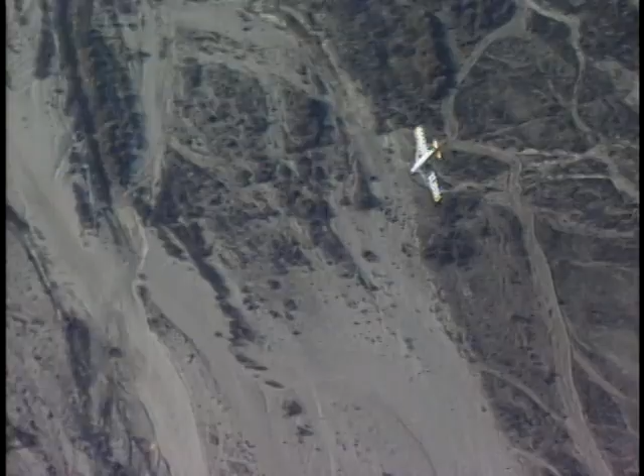You're about to see one of a series of accident prevention safety seminars I've been conducting across the country for the FAA. This seminar addresses the stall spin awareness training requirements outlined in the FARs. You'll also see actual flight footage used to illustrate and clarify many of the points discussed. As always, if this video prompts you to take some hands-on spin training, please be sure you're comfortable with your instructor's qualifications and only use the appropriate equipment in the appropriate airspace.

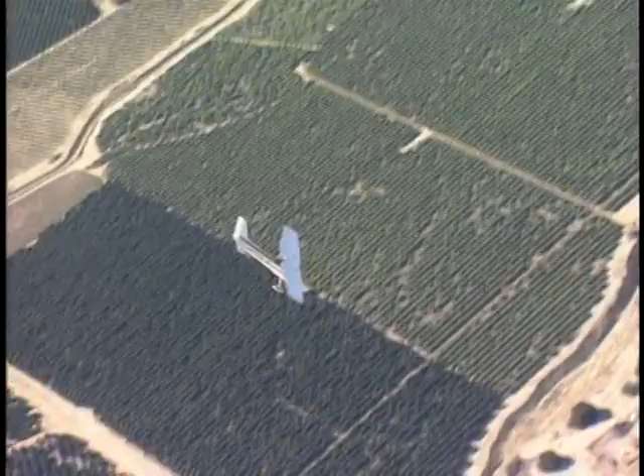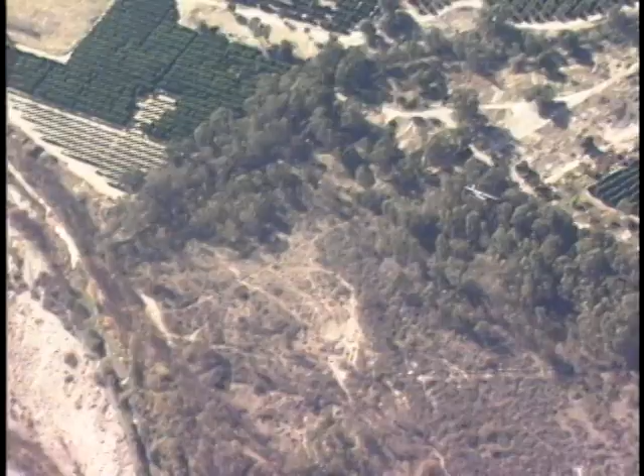I open my seminars by showing a video clip of a Cessna 150 spinning high above the Santa Clara Valley near Santa Paula, California. Let's view that clip now and then continue with the seminar. This airplane is spinning, but is it really out of control? Year after year, National Transportation Safety Board statistics show that the majority of aviation accidents occur during day VFR conditions, and many can be attributed to pilot error. If you were the pilot in command, would you know how to get yourself and your passengers out of this situation?

Okay, the first three comments I'll make are: one, yes, we do eventually recover from the spin. The second is this is a standard Cessna 150. It is not an Aerobat. There's nothing unusual about the airplane other than given the right conditions, the airplane will enter a spin and stay in a spin just fine until the pilot does something to recover.

And the third comment is, by the fourth turn, yes, I wasn't feeling very well.

Okay? So having said that, to start off a discussion on stall spin awareness, I'm going to just review a little bit of the history of how we got to the point we are now with the latest changes to the regulations, and just point out some of the key points in history. And we have to go back to 1912 to a British test pilot by the name of Wilfred Parke, who one day while testing an airplane inadvertently entered a spin, and being a good test pilot, he tried to figure out, well, gee, how am I going to get out of this now?

And he played around with different control inputs, and he identified the application of opposite rudder as being critical for recovering from the spin. And he actually recovered from this inadvertent spin about 50 feet above the ground. So he landed and he started to tell people what had happened. And so once people realized they could recover from these things, they became an evasive maneuver used during World War I. And by 1917, spins were actually introduced as part of primary pilot training.

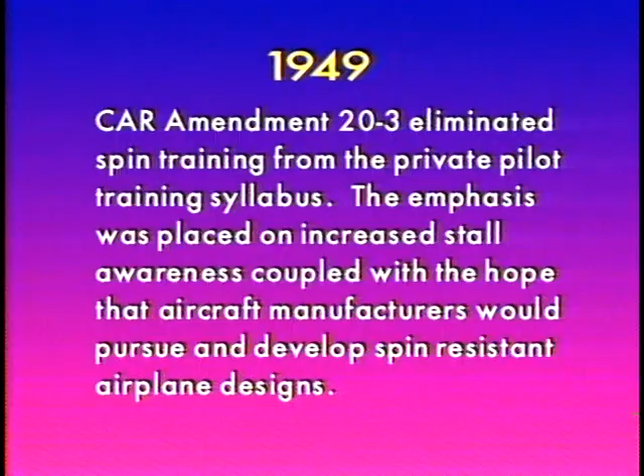And the government was also hoping that airplane manufacturers would take it upon themselves to build airplanes that were more spin resistant. Unfortunately, that didn't really happen. And so by 1991, effective April 15th of this year, FAR Amendment number 90 went into effect, and it now requires stall spin awareness training. Okay? And these levels of training for stall spin awareness affect everybody at some point in time. They affect recreational pilots, private pilots, commercial, glider, and eventually CFI applicants who will have to actually do spin training in order to get their CFI rating.

Well, based on this brief little overview of the history, we can come up with a couple of different points. First of all, historically, it seems about every 40 years something significant happens as far as stall spin awareness. So based on that, I figure about the year 2030 we'll have spin training required again for all primary pilots.

Even though part of the reason that they deleted the spin requirements back in 1949 was to try to reduce the number of fatalities due to stall spin accidents in the general aviation community, still today we're faced with the problem that annually stall spin accidents account for the greatest number of fatalities. If you're going to die in a general aviation airplane, more than likely it'll be in a stall spin accident. So that still hasn't changed, although the percentage has dropped dramatically from the 40s.

Also, the majority of stall spin accidents occur during the critical flight phases, which we might expect, during takeoff and landing, where a pilot is low, slow, close to the ground, high angle of attack, and has a lot of distractions, like obstacles and other people in his way.

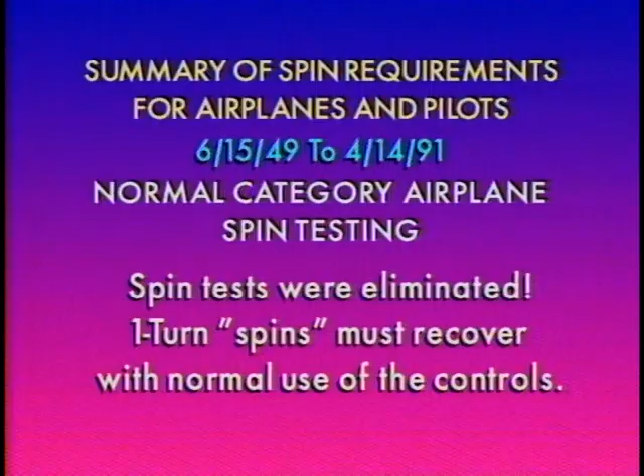Well, once spin training was deleted in 1949 until April of this year, 1991, what they did was for normal category airplanes, they relaxed the spin test requirements, and now they're under the restriction of a 1-turn, and I put it in quotes, spin test. All right, essentially, spin testing was deleted for normal category airplanes.

A 1-turn spin, you can read in the flight training handbook or talk to anybody who does a lot of spins, a 1-turn spin is not a spin. It is nothing more than a test of the airplane's controllability in an abused or an aggravated stall. Okay, it is at the very most a very, very young spin. And in addition to that, if in that 1 turn the test pilot can move the controls in some normal fashion to effect a recovery, then the airplane is classified okay for use in the normal category.

Unfortunately, on the pilot spin training side, no spin training was required. And in addition, the spin endorsement for CFI applicants was actually optional. You could go take your check ride and not have a spin endorsement in your book. All right, so we have a situation where normal category airplanes are not spin tested, first of all, and second of all, the pilot has to know what to do to get it out of a spin, but on the training side, we don't need to teach you how to do that.

So in an effort to try to balance it out, spin training compared to airplanes that aren't having to go through a spin test, versus no spin training against airplanes that would fix a spin if you just simply let go, the latest changes that came out address the pilot spin training issue by requiring increased stall spin awareness training.

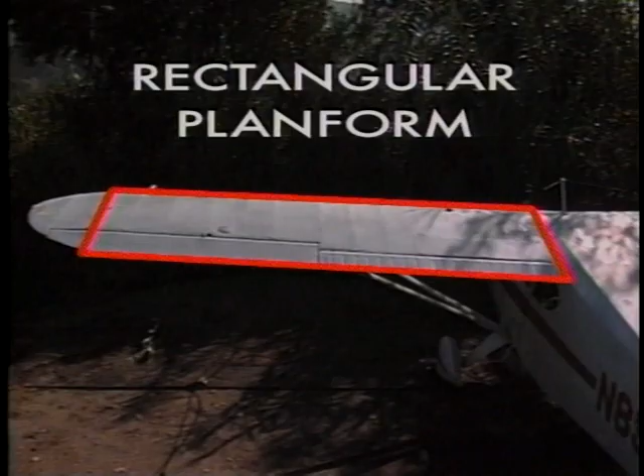And it's very important to maintain your heading and your wings level working rudder inputs. And we'll talk about why that is right now. And what I'm going to show you are the typical stall patterns for various wing planforms. We'll see what goes on when the wing stalls. And the first wing I'm going to talk about will be the rectangular planform, which is very typical on most of the primary trainers that we have.

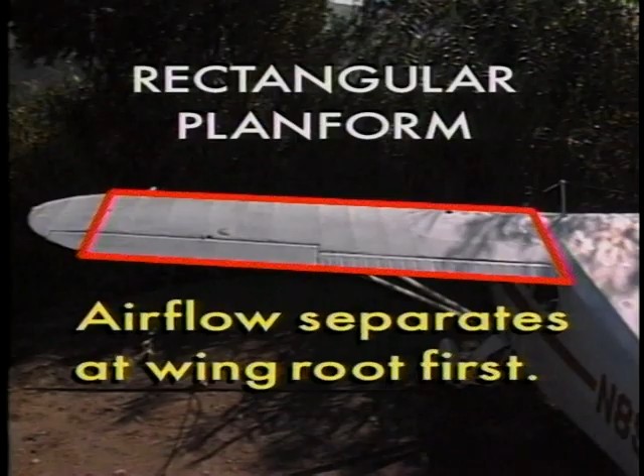The rectangular planform is not very maneuverable, and so what does that mean? It's probably pretty stable. And when it's flown correctly, that's what we see. Not much maneuverability out of a Cessna 152 or 172, but relatively stable. And what happens during a power-off stall in a rectangular planform, the airflow begins to separate at the wing root first. And that gives us a couple of added benefits. First of all, the turbulent air spills off the wing root. It hits the fuselage of the airplane and the tail section. That's where we get our aerodynamic buffet. So we get good stall warning with the rectangular planform.

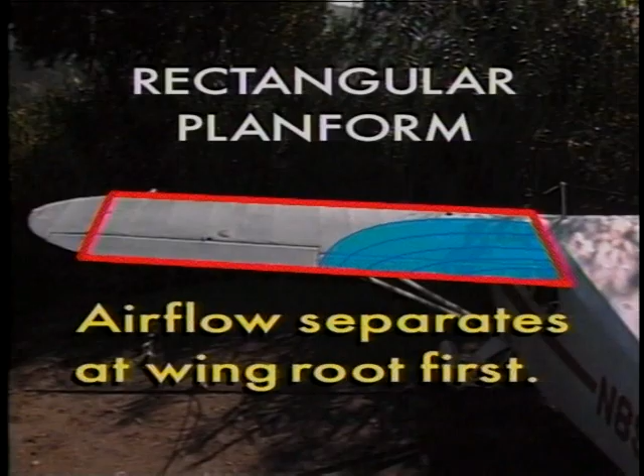The other thing it affords us is good lateral control, good aileron control a little bit longer. The aileron sitting out at the wingtip, well, if the stall starts at the wing root and progresses outward, we can use the ailerons a little bit longer until the stall gets out into that area, at which time we don't want to use the ailerons anymore because they can actually aggravate the situation. All right? So very, very stable configuration, rectangular planform, desirable stall characteristics.

In a power-on stall, however, the slipstream from the propeller may delay separation of airflow at the wing root. And in fact, it may occur a little bit further out. You may lose aileron control a lot sooner in a power-on stall than a power-off stall. And you may not get the good aerodynamic warning that you get in a power-off configuration.

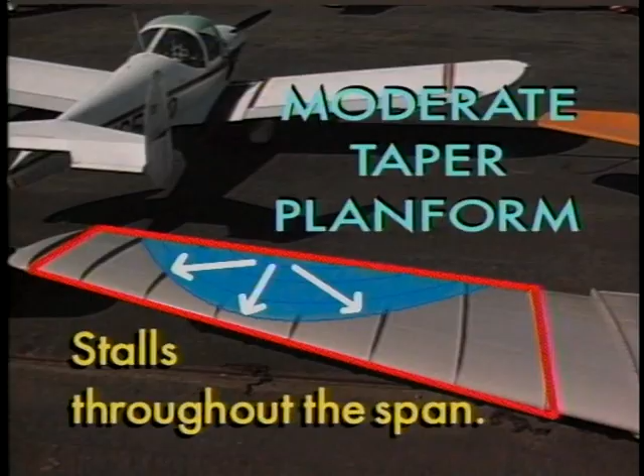Well, if we move to a little higher performance planform, the moderate taper, a little higher performance, so that means a little less stable. And the characteristic of the moderate taper planform is that it tends to stall throughout the span all at once. So right away at the stall break, you lose lateral control. Ailerons aren't so effective anymore, and so now we have to think about leveling our wings with the rudder right away. So it requires a little bit more rudder work at the stall break.

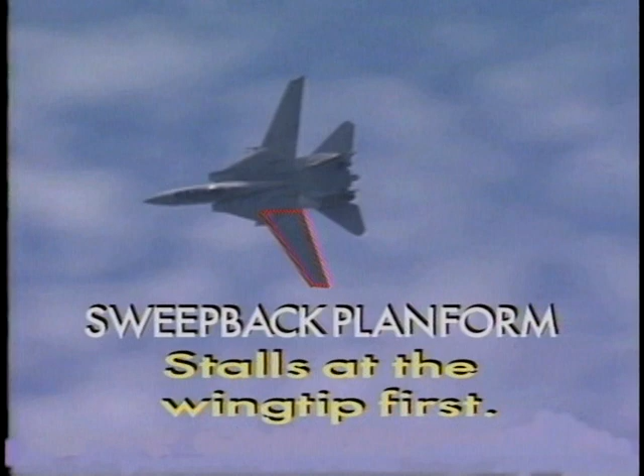And the third planform I'll talk about will be one that has sweep back. A swept wing is a very high-performance airfoil, very maneuverable, all right, and therefore not very stable. And the characteristic of the swept wing is that it will stall at the wing tip first. Very violent stall characteristic, all right? And what happens, we lose lateral control, aileron effectiveness right away, immediately at the stall.

But also, by stalling out at the wing tip, if it's severe enough, we can shift the center of pressure of the wing ahead of the center of gravity of the airplane. And what can happen, the airplane can diverge into a pitch-up mode, into a higher angle of attack, and become non-recoverable. All right? So very maneuverable, but not very good stall characteristics.

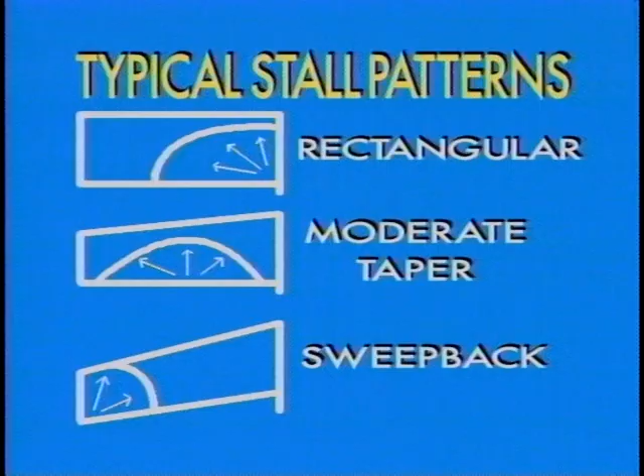Now, one of the interesting things is that we can get a rectangular planform to act like a swept wing planform in terms of stall characteristics. Anybody know how we do that? Go ahead and yaw the airplane. Okay, if you yaw the airplane, the airflow starts a cross flow along the wing, and it begins to take on the characteristics of a swept wing. So you can start to see how important the rudder really is.

Right? We can take a relatively docile planform, and by mishandling our yaw control, turn it into something much more aggravated. And in the skidded scenario, what's happening? The pilot has lots of yaw. Okay, he's got a planform that could be acting like a swept wing with a stall somewhere out at the wingtip and a very violent roll into the spin. And if he's got some opposite aileron as well, it will further aggravate it and make an even crisper entry.

If you ask an aerobatic pilot, you know, what's a good way to enter a spin, he'll probably tell you to do something very similar to that. Okay? So the rudder is very, very crucial, especially in our lower performance airplanes, to keep our planforms working the way they're designed to work. Favorable stall characteristics.

Okay? What I'm going to show you now on video is just some normal stalling back to our emergency recoveries in our Cessna 150, making the nose and the control wheel move in the same direction. And one of the ways we teach our pilots to do our stalls is not only looking over the nose, but also they can do an entire stall entry with recovery looking out at the left wing only, or looking out at the right wing. They can do the entire process without having to look over the nose, because if you inadvertently enter a stall, who knows where you're going to be looking? So it's good to have a lot of different sources of information.

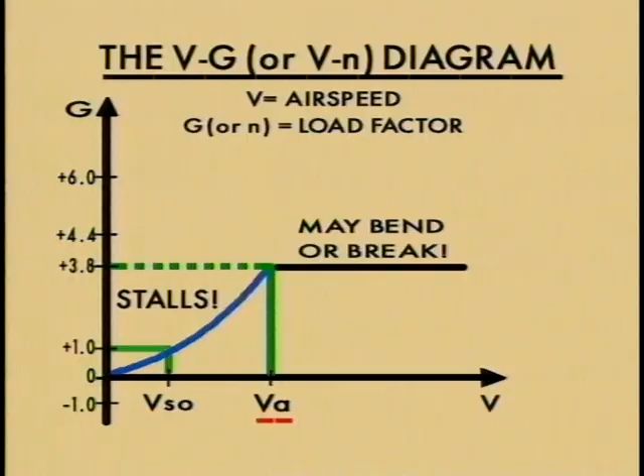What is maneuvering speed? It's the maximum speed at which we can make full or abrupt control deflections. Why? Because the airplane will stall instead of bend or break, right? And in fact, at or below maneuvering speed, the stall is an aerodynamically good thing for the airplane. It keeps us heavy-fisted pilots from breaking it all the time. All right? Above maneuvering speed, we're limited structurally. We may bend or break the airplane before we ever exceed the critical angle of attack.

What do airplane manufacturers recommend in turbulent air? Some speed at or below maneuvering speed, right? Because if you are doing a maneuver and you get a gust load or a turbulent encounter, the airplane will stall instead of break. Pardon me? Maneuvering speed is also adjusted for weight. Yes, that is correct. As the airplane's weight changes, this whole picture will change as well, up or down, depending whether the weight goes up or down. The important thing is, at any speed below maneuvering speed, we can stall the airplane given the right G-load combination.

And in fact, in our skidded spin scenario, we're not at VSO. Very, very few, if any, stall spin accidents occur at VSO and 1G. They occur during some kind of a maneuver where the pilot is at a higher G-load and therefore at a higher stalling speed. And if you look in the performance charts in the pilot operating handbooks, what happens? As angle of bank increases, so does stall speed, right? Why? Because the G-load necessary to sustain the turn at the higher bank angle increases. G-load increases, stall speed increases.

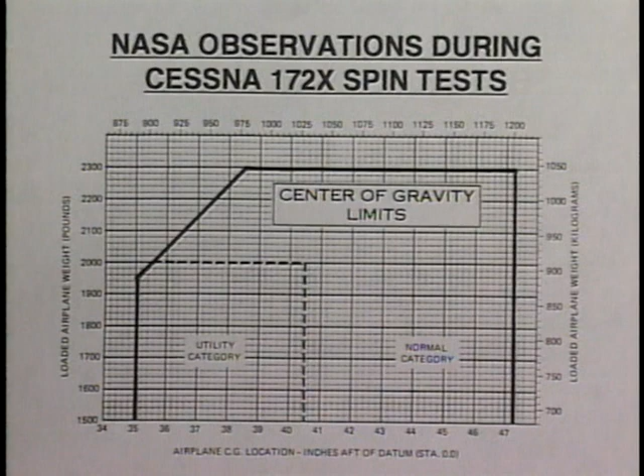And the first picture I'll show you here is the operating envelope for a Cessna 172 that shows center of gravity as a function of weight and defines the operating envelope. Now, the Cessna 172 is a dual category airplane, utility at lower weights and forward CGs and normal category elsewhere. All right, and the first important point I'm going to make is in all normal category airplanes, intentional spins are prohibited, because they've only had to demonstrate recovery from a 1-turn spin within 1 additional turn, which really isn't a spin test at all.

Okay? And it's very, very important for me to try to convince you and for you to convince yourselves that you do not spin a normal category airplane. Okay? For 2 reasons. First of all, chances are the airplane has not been spun beyond 1 turn, and so if you go beyond 1 turn, there's absolutely no guarantee that it will be recoverable, and you are being the test pilot. You're doing something for free that perhaps the paid test pilot didn't want to do or wasn't required to do. Or perhaps the test pilot did go beyond 1 turn and he didn't like what he saw. Okay?

And he had a parachute to do something about it, and if you don't, you know, you could be in a lot of trouble. Don't spin a normal category airplane, no matter who's in it with you. I don't care if it's a high-time CFI or an ex-military fighter pilot. Don't let anybody talk you into spinning a normal category airplane. It might recover one day, but it might not 5 minutes later if you try it again. Okay? It's very, very unpredictable past 1 turn.

Utility category airplanes you have to be a little bit careful with. Utility category airplanes can be tested one of 2 ways. They can either be spun as though they were an acrobatic category airplane, which means a full-blown 6-turn spin, or they can undergo a spin test as though they were a normal category airplane, which means recovery from a 1-turn spin. If a utility category airplane has been tested like a normal category airplane, it will have a placard in it saying intentional spins are prohibited. So that means don't spin that airplane.

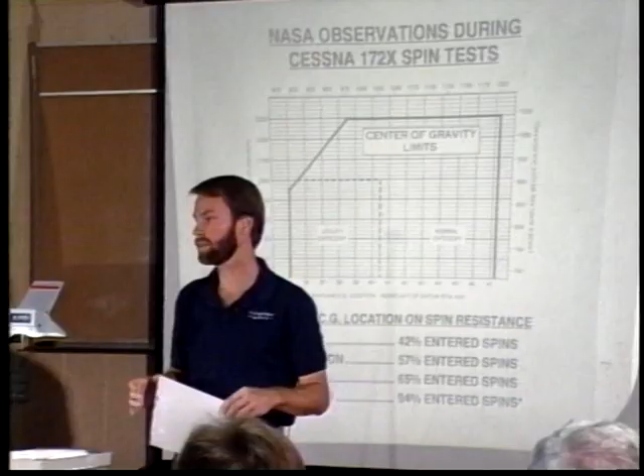If you're a student checking out in an airplane, you might suggest the same to the instructor. Say, before I really put my family in this airplane and go on a trip, will you find a couple of other people, put them in the back seat, and let's go out and fly this airplane how I'm really going to use it. Okay? Might not be a bad idea to keep in the back of your mind.

All right, the next piece of video I'm going to show you is some actual NASA footage taken when they were flying the Grumman Yankee. And the Grumman Yankee is a normal category airplane, and so what NASA did right off the bat was they installed the spin chute on it. They didn't want to take any chances. And what they found was, beyond one turn, the Grumman Yankee liked to just go into non-recoverable spin modes. It did it a lot. Okay, so they used the spin chute a lot.

And what you'll see is different camera angles, one camera out at the wing looking down the wing into the cockpit, one camera angle over the pilot's shoulder, one looking back at the tail. The airplane is tufted so you can see kind of what the airflow is doing over the different control surfaces. And then they'll cut in some of the dialogue that the test pilot is having with the ground people, some of the information he's relaying. And we'll see kind of what happens here.

The other thing I want to point out is the speed of this footage. The spin might look fast to you, all right? But the cameras were actually set at 2/3 real time. So the real spin the pilot is in is a little bit faster than what we see here.

For years, NASA and the military have been conducting spin research in an attempt to analyze spin characteristics, evaluate spin recovery techniques, and develop spin-resistant airplane designs. To understand the complex mix of variables that determine the dynamics of spins, NASA collects electronic, visual, and audio data during spin tests of general aviation aircraft. Cameras mounted at different stations on the airplane record airflow patterns and control positions. The random and disturbed tuft movements are indicative of the turbulent airflow associated with high angles of attack. Listen as the test pilot relays information during this spin.

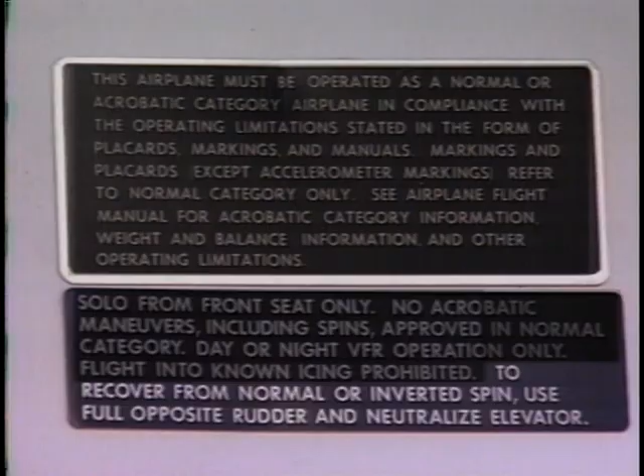Well, let's take a walk out to the airplane, and let's climb in and take a look at the placard in the cockpit of the same airplane. This is what it says. To recover from normal or inverted spin, use full opposite rudder, then neutralize elevator. So, we can cut them some slack on the placard in the cockpit by saying, well, they're saving space, that's why they didn't say anything about throttle and ailerons.

But is it really that significant? It doesn't really matter whether the rudder comes first or the elevator comes first as long as we do them all? Well, in our experience, yes, it is. And in NASA's experience, it is as well. All right? Typically, what happens when you apply elevator first, we get the accelerated spin mode.

And a pilot in an inadvertent spin situation, if he applies an input and he sees the spin get worse, what's he going to do? One of two things. He's either going to stop right there and never make the primary recovery input, which is the rudder, or the added adrenaline rush is going to result in an even stronger push on the elevator and can transition the spin from upright to inverted.

Okay? What I'm going to do now on video is show you typically what a student might do to me as the instructor in the Decathlon. I'm going to enter an upright spin in the Decathlon, and then I'm going to implement the procedure outlined in the pilot's operating handbook instead of the one in the cockpit on the placard. And we'll see what happens. We'll actually transition the spin from upright to inverted.

Watch as the Decathlon enters a 2-turn upright left spin and then transitions to an inverted spin to the right. At 1.5 turns, forward elevator is applied, then full right rudder. The airplane slows down, appears to stop, and then quickly transitions to inverted. To avoid the accelerated spin and transition spin modes, apply full opposite rudder first, followed by the elevator neutral.

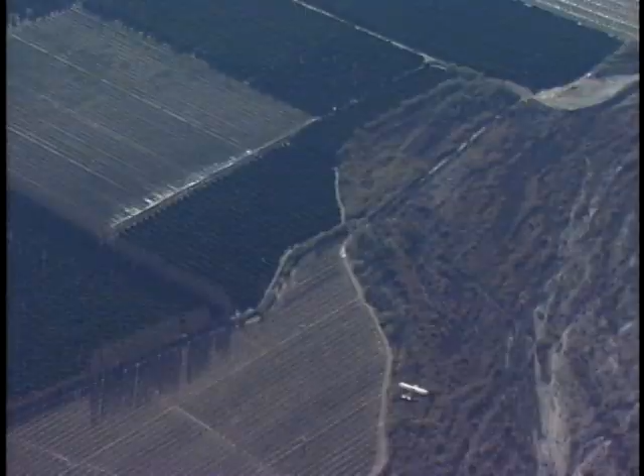So we can go from bad to worse in a big hurry. Fortunately, in the Decathlon, being an aerobatic airplane, it's stressed for +6, -3. You go through about 2.5 to 3 negative Gs for that transition. If somebody got real strong in a Cessna 150, which is stressed for minus 1.52, you'll break the spin, you'll break the wings, and a few other things. Okay, so you get out of the spin, but you'll have some other problems to deal with.

It's important to move the rudder first, followed by the elevator input. And even manufacturers are not clear what procedure to implement. So our final analysis on that is a seemingly minor change in the order of spin recovery events can have a dramatic impact on the character of the spin. Okay? All right, let's take a look at another procedure.

Take a look at a typical Beechcraft procedure. It doesn't really matter. They're all cookie cutter from one airplane to the other with Beech. But at least, even though we had some problems with the Decathlon handbook, it was easy to read. It was step by step. We had a little problem with the order of things, but it was a little easier to interpret.

Let's take a look at the Beech procedure, a big paragraph. And it starts off: immediately move the control column full forward and simultaneously apply full rudder opposite to the direction of the spin. Continue to hold this control position until rotation stops, and then neutralize all controls and execute a smooth pullout. Aileron should be neutral and throttle in idle position at all times during recovery.